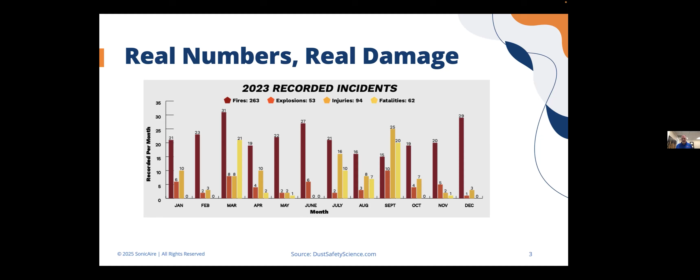Okay, so let's look at the real numbers. This is the 2023 data from our good friends at Dust Safety Science. There were 263 recorded fires and 53 explosions related to dust in 2023, which resulted in 94 injuries and 62 fatalities. So if you work in and around dust, you can see that even though our awareness as a society has increased, there's still significant opportunity to do things better.

Looking at the food and grain industry in 2023: 9 explosions, 12 injuries, fortunately no fatalities. That's positive. Then in 2024, also 9 explosions, 2 injuries, no fatalities. So the injuries are coming down, that's a good thing, but the 2-year trend of being flat at 9 explosions per year is not great. If you work in grain, statistically speaking, if you stay on trend, you might expect to see another 9 explosions this year. I hope that's not the case. Be careful, and I'm glad you're here. Hopefully we can work together to continue to try to take these trends down to zero.

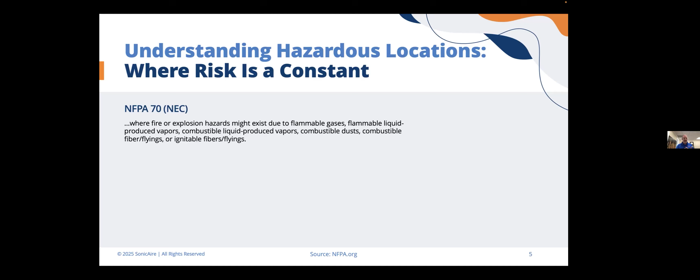All right, let's take a look at understanding hazardous locations. This all starts with NFPA 70, the National Electrical Code here in the United States. It states that where fire or explosion hazards might exist due to flammable gases, flammable liquid-produced vapors, combustible liquid produced vapors, combustible dust, combustible fibers and flyings, or ignitable fibers and flyings, that is considered a hazardous location. We're going to talk about the first couple of categories there.

The first one is called Class 1, that's the flammable gases and vapors and where those may be present. We're going to steer away from Class 1 today; we're not going to get into that. But we are going to talk about Class 2 environments, that's where the combustible dust may be present. So if you're here today, you're probably in and around a Class 2 environment. But it even goes further to break that down, so let's look at the different divisions.

Division 1 is a place where combustible dust is in the air under normal operating conditions in quantities sufficient to produce explosive or ignitable mixtures, or where a mechanical failure could lead to a state of ignitable mixtures. So regularly, frequently. Division 2 means combustible dust due to abnormal operations may be present in the air in quantities sufficient to produce explosive or ignitable mixtures, or where malfunction could cause dust accumulations to become suspended in the air.

So Division 1 is likely... Division 2 is unlikely to have those conditions.

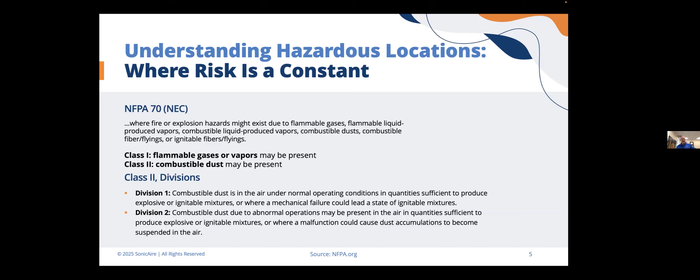Chances are some sort of AHJ, authority having jurisdiction, or some inspector, or maybe even an engineer has already determined if these areas exist in your facility. Some facilities take the highest level of safety approach and just use nothing but Class 2 Division 1 equipment in their facility, and that's okay. It's expensive, but it's a very safe approach for their operating procedures. But knowing which zone you're operating in is really the first step, and then the second is making sure your equipment and your strategies are designed to handle it.

So you already wear a lot of hats, but when it comes to dust, you're probably also the compliance person. OSHA starts with the general duty clause: each employer shall furnish to each of his employees employment and a place of employment which are free from recognized hazards that are causing or likely to cause death or serious physical harm to employees. And yes, it does consider combustible dust to be a recognized hazard, and it expects you to manage it as a recognized hazard.

OSHA 1910.272 is specific for grain handling facilities, and that requires immediate housekeeping for fugitive dust greater than 1/8 inch, and it also restricts the use of compressed air for cleanup. It's got some stipulations and some regulations around that.

NFPA 660, which is brand new, as Chris mentioned, I'm now excited to say I'm part of the committee and gonna be working on the future revisions of this standard as it goes forward. That's one of the great things about NFPA, they don't let their standards get stagnant. They are always under a continuous revision cycle. So if you have input on that, you can go and actually be a part of that revision process as well as that standard continues to evolve.

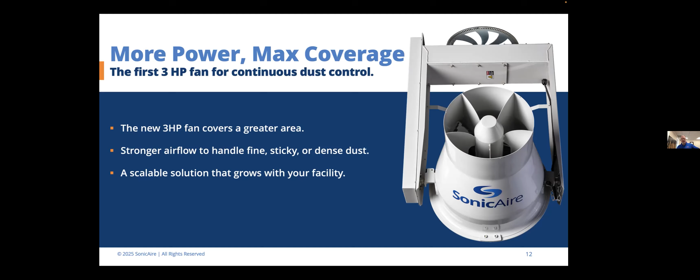You saw in the video how BarrierAire keeps overhead surfaces clean by continuously pushing down the dust before it sticks. But we also like to talk about dynamic particle control, and that's how the fans run intelligently to help you maintain compliance. They run smoothly with intelligent airflow that adapts to your space, so we can control the up and down movement and oscillation of the fans.

But the best part is these systems don't replace your team. They support your team. Your people stay focused on their higher priority tasks, not climbing into lifts and chasing dust. And even in multi-story facilities like this application, a system like this will actually push the dust all the way down till it reaches a solid ground floor where it can easily be swept up and collected.

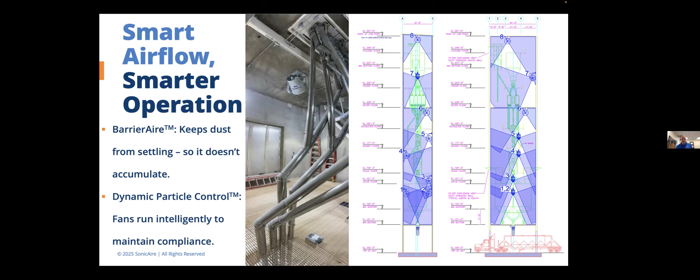This is your playbook for staying ahead of risk: clean overheads, safer workflows, and less stress.

Meeting compliance standards is tough when the rules keep evolving and inspections can happen at any time. But the good news is SonicAire fans are built to support the standards you're already trying to meet. UL certification means you're using a proven and accepted method in Class 2, Division 1 or 2 zones.

And when OSHA or your insurance agent asks how you're managing combustible dust, you can show them more than just housekeeping logs. You can show them a system that's actively running 24/7. You don't need to chase compliance, you can actually lead the way.

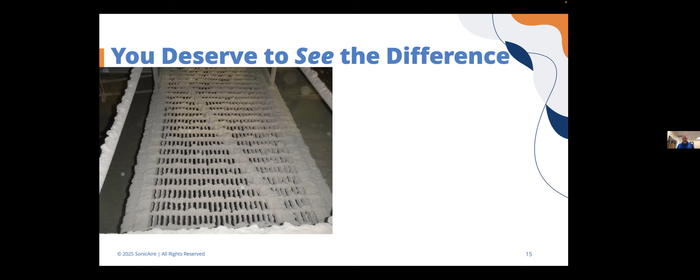The best part of a proactive dust control system is you get to see the results, and so does your inspector. In this facility, they went from thick layers of dust coating everything in sight to a facility that stays clean day after day.

The dust didn't disappear, but it was safely moved to the floor where it can be easily captured, contained, and removed continuously. This is the visual proof your team, leadership, and insurers want to see. Not just that you cleaned, but that you're in control.

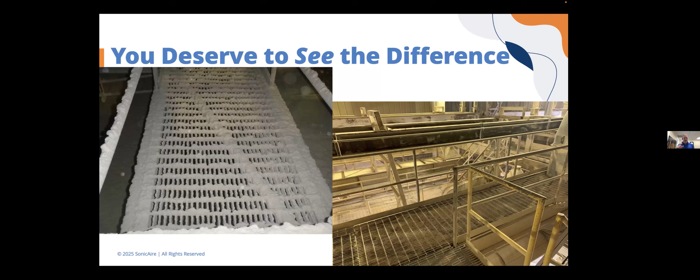Every facility we work with experiences this type of moment where they go, wow, it's really working. Here's another example: no accumulation and no stress.

Here's how a feed mill changed the way they operate for good.

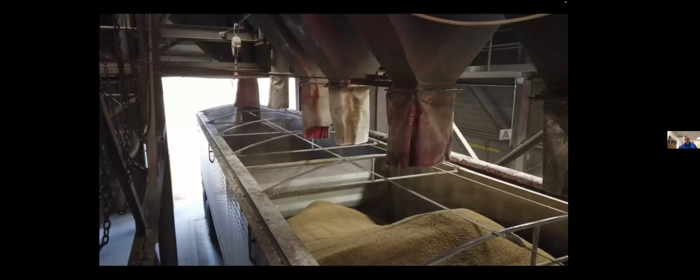I'm Ron Kirchhoff, Regional Operations Manager for the Midwest for McNess. I oversee Lodi, and then we have other locations in Wisconsin, Nebraska, and Illinois that I oversee. We make livestock and poultry feed, but that could mean beef, swine, sheep, chicken, duck, all kinds of different feeds. It brings in a lot of different ingredients: corn, soybean meal, salt, calcium, all things you need in your diet goes into an animal diet. And I've always said that animals eat better than humans because we give them what they need every time and every bite.

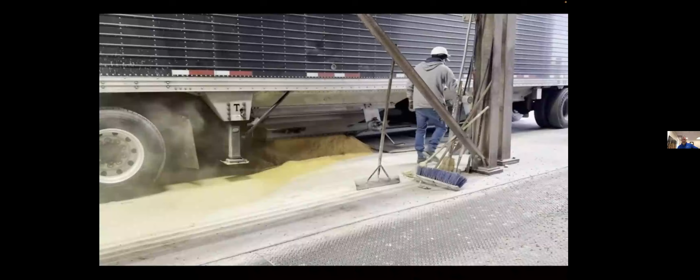You'll bring in the raw ingredients, you bring in the corn. When you grind the corn and roll the corn, there's potential for dust. You try to have an enclosed system, but even then, a little bit of dust leaks out, so it'll be in the air. It's a constant challenge to keep it clean.

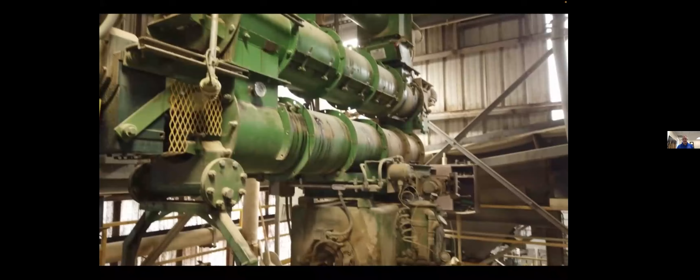Once you weigh it up, it gets mixed up, we end up pelleting it, and then we cool it off. Then we put it in a bin to either be shipped out in bulk form, or we put it in a bin to be bagged off. Anytime you're weighing up product, there's a little bit of dust that emits as you're dropping it into a bag, and a little bit of dust emits when you're dropping it into a bulk feed truck.

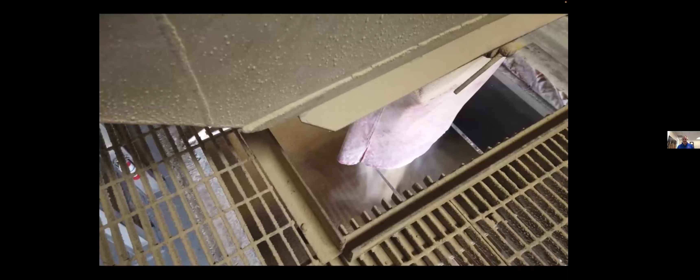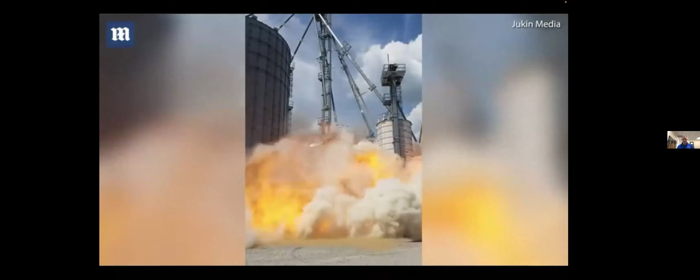It's very important to control your dust. We've all seen explosions over the years or seen it on the news, and those things are just simply devastating. One of your big worries as a manager of a feed mill or a grain facility is making sure you're keeping the people safe. You've got to keep your dust levels at a certain level. The last thing you want is to have to tell a family member that your son or your daughter or your husband died in a grain explosion.

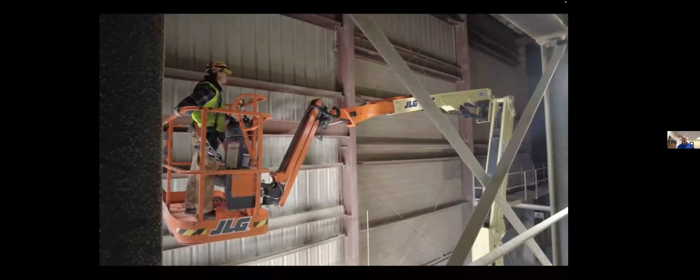So it's always on top of mind to do the right thing. Before we got the SonicAire system, we'd bring in about 4 to 5 people, 5 hours on a weekend, so it's all overtime help. We'd do that like once a month. We'd bring in a scissors lift, elevate to the top, bring in brushes and air wands and blow off the ledges, and then after you're all done, people would come in and sweep it all up. It was a big, dirty job. I even helped a few times myself, and it's not fun, but it's just something you have to do when you're in a feed mill.

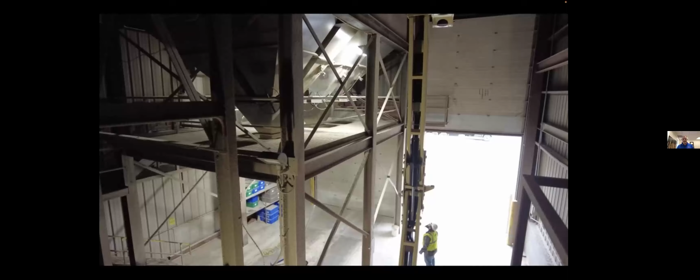These sidewalls in the loadout receiving area are 40 feet tall, and it's hard to reach those areas with a broom or an air wand, and you're putting people at risk by elevating them clear up there and blowing things down. It's a problem area, hard to keep clean, so why not put in a system that will automatically do it for you? I'm glad that Furst-McNess allowed us to try the system.

I think it's a very good application. I think it's going to be positive for us to keep that area clean and meeting the OSHA requirements. Everybody has to deal with OSHA. You try to do everything you can, do the right thing for the employees and the team to make sure things are right so it's a safe environment. But if something does happen, then OSHA would come in, and then it's all over with. You can't really react to it, it's too late. In our feed mill and other typical feed mills, you have Class 2 Div 1 areas, and you also have Class 2 Div 2 areas.

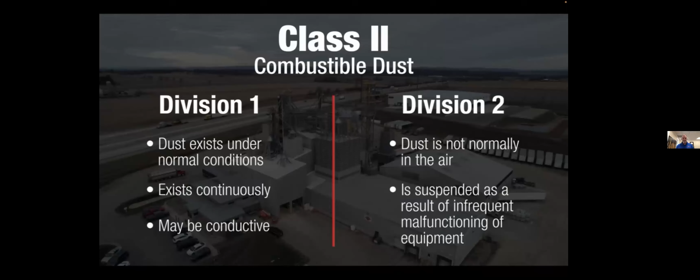The Class 2 Div 2 areas are where dust can be in the area occasionally. Class 2 Div 1 is where dust can be in the air all the time, or there's a big potential for dust. So if you have an ignition source, then you'd have a chance for an explosion. Here in the loadout receiving area, we consider that a Class 2.

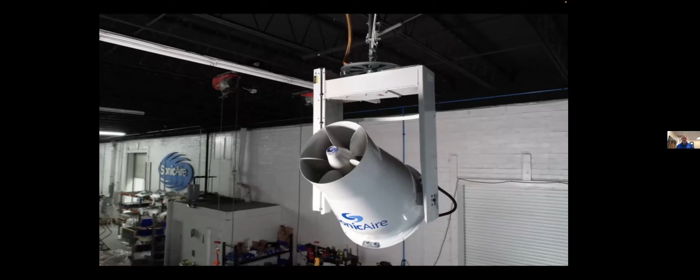So we're able to put the SonicAire fans in. I'm excited to hear that SonicAire now has a Div 1 fan, so we can apply it in the interior parts of the feed mill area too. I think other mills in the country have probably been looking for the same solution.

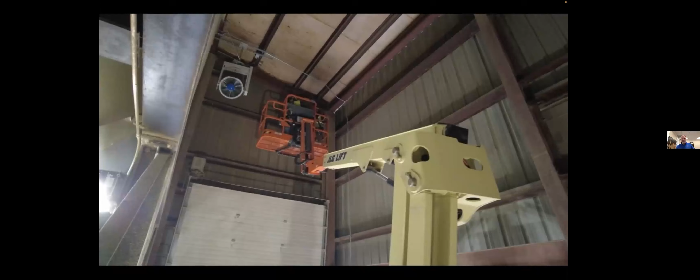I'm excited about the SonicAire fans. This is going to save us a lot of time and overtime labor. I estimate it's going to save us $10,000 a year just in overtime costs alone. Right now we're trying to do it once a month, but sometimes it gets pushed off to 6 weeks, and you don't get as clean as you want it to be. So I'm just excited to really be able to keep that area clean on a constant basis going forward.

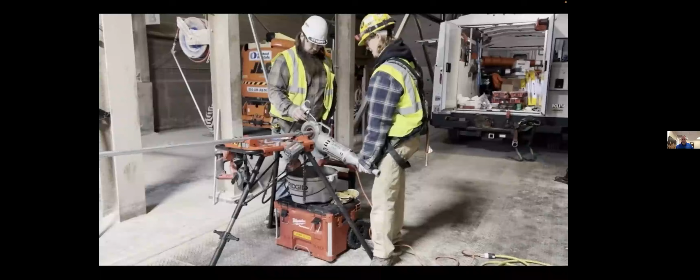We went with a turnkey system mainly because we wanted to make sure that it got done right. It was installed by professionals, and the other factor was just time. We were all busy managing other things and didn't have time to do another project like this. So once the turnkey was available, it's like, yeah, let's go. And it was a competitive price.

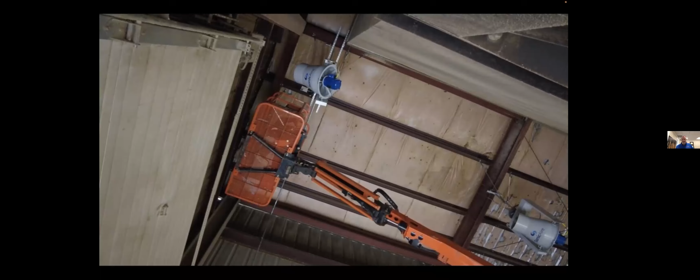I've been very pleased with SonicAire. I think you guys have a good team, you communicate well. After we decided we wanted to go with it, you guys were out here 2 or 3 times looking at the process. You guys do a spectacular job and pay attention to the details. As long as these things work long term like I think they will, I'd have no problem recommending the SonicAire fans. I think it's a good solution for feed mills or grain facilities that have difficult areas to clean, and I think it's a winner.

So Ron didn't just buy fans, he helped his team claim back control of their time, their safety, and their budget. So now let's take a look at one more video.

This is BDS Tire Recycling Facility, and take a look at how they took control of their dust and also got some time back as well.

My name is Tobias Cole, plant manager of BDS's tire processing facility. We own and operate the only 2 permitted facilities in all of New England. We all take a lot of pride in the facility itself and its maintenance, making sure that the facility not only functions properly, but is kept up well.

One of the challenges with a facility like this is making sure that dust mitigation is constant. Along with the regular dirt and dust that comes in with the tire material itself, the primary generator of dust is the textiles inside the tires - nylon, polyester, rayon. When those are liberated, they often are basically suspended in the atmosphere. Those are all petroleum products, so they're all very combustible. We've actually had them tested - they burn at over 16,000 BTUs.

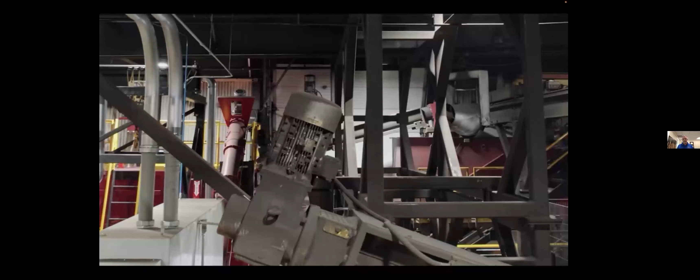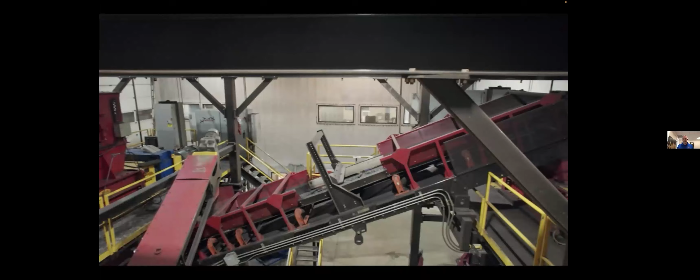On days like today, it can easily get to be 120 degrees up on the mezzanines. When you're getting up around 20 or 25 feet above that, it's probably easily in the 150, 140 degree range. So safety becomes an issue at that point.

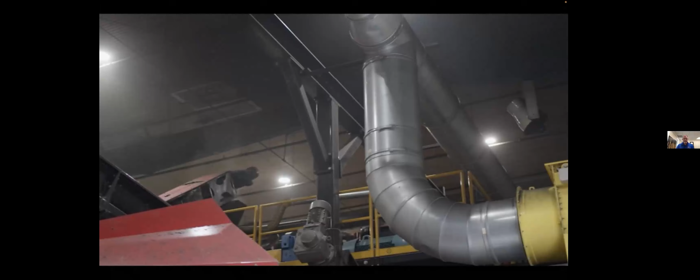The SonicAires not only help us keep the dust down, but they actually blend the air for us. So it helps in the summertime cool the upper areas, and in the wintertime it helps blend some of the warmer air down on the ground level.

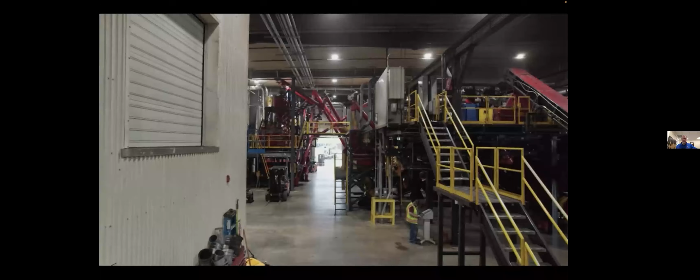With the extra time that we have now that we have the SonicAire fans, we're able to focus more on other areas of facility maintenance and cleanliness as well. We are able to really focus on the ground levels and the mezzanine areas.

Maintenance-wise, the fans themselves have been extremely reliable. It's a tough environment in there - it really is. There's a lot of heat, there's a lot of dust, and the fans, for the most part, have performed flawlessly, really. I have nothing bad to say about the fans. I would recommend them to anybody that's in this kind of environment.

They keep on going. The only time we'll shut them off is if we have to do welding or maintenance that's close to where it's going to blow, because they do put off a lot of air. If we keep evolving, we will actually keep adding more fans.

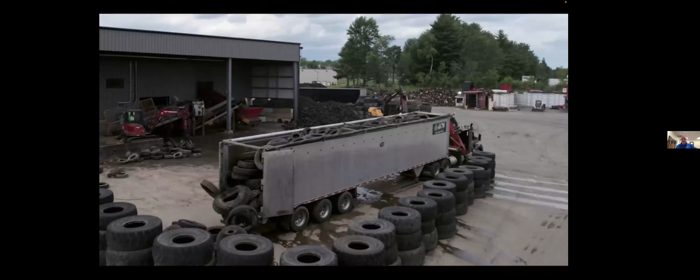At every recycling facility, dust mitigation is a serious issue - not only a safety issue, but just a general housekeeping issue. And the fans themselves have been pretty much a solve for us in those hard-to-reach areas and those high-temperature areas.

I would definitely recommend SonicAire to other recycling facilities. The one comment we always get is, we can't believe how clean it is. And SonicAire helps us achieve that goal of maintaining a clean facility.

So less time cleaning, more time producing. The team feels safer. Their safety program has gained a new powerful tool to help them maintain compliance. And the story here is simple. When you take control of the dust, you take back your time, you take back your safety, and you take back control.

So what happens when you stop chasing dust and start controlling it? Well, there is a financial ROI involved. You have no overhead cleaning cost, lower labor cost in general, no shutdowns, so increased uptime, increased productivity, and potential insurance savings with having an engineered control solution like the SonicAire fans.

There's also a regulatory ROI, so you can avoid citations with continuous compliance, easier inspections and documentation, and backed by the SonicAire compliance guarantee. I'll talk more about that in just a moment.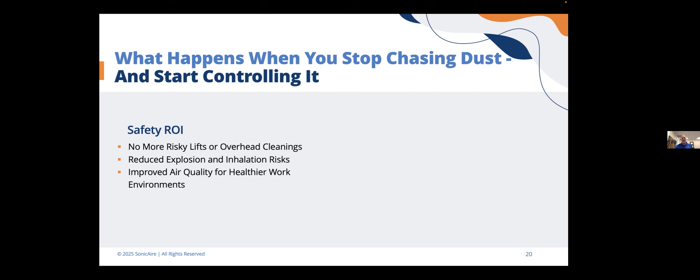There's a safety return on investment as well. No more risky lifts or overhead cleanings, reduced explosion and inhalation risks, improved air quality for healthier work environments. And then that gives you a competitive ROI. It demonstrates proactive safety leadership, builds trust with your employees, insurers, auditors, and partners, and it improves your morale and overall culture for your facility.

So one of the most important returns you get from automated dust control is confidence. Confidence that you're meeting OSHA and NFPA expectations, confidence that your workers are safe, confidence that you're not one surprise inspection away from a violation. And here's the big one.

You're not doing it alone. Our SonicAire compliance guarantee that I mentioned earlier backs you up. If our fans are installed and maintained properly and you get fined, we'll actually pay the fine or refund you the cost of the fans. It's really that simple. So that's how confident we are in the system and how committed we are to helping you stay compliant, safe, and productive.